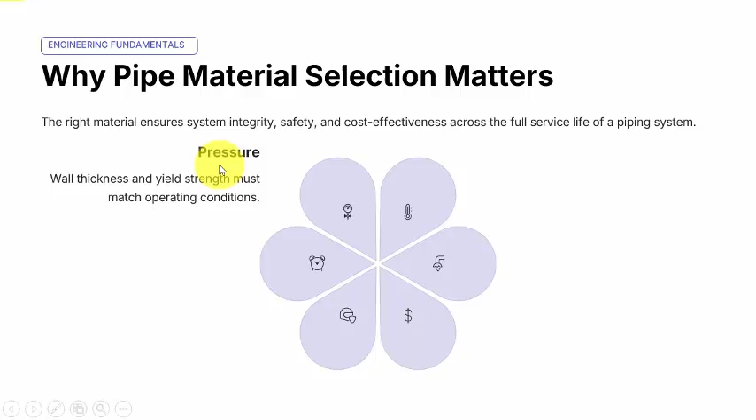Why pipe material selection matters. Selecting the correct pipe material is one of the first and most important engineering decisions during piping design. Several factors must be considered. First, the material must withstand the operating pressure without failure. Second, it must maintain its mechanical properties at the required operating temperature. Another critical factor is corrosion. The pipe must be chemically compatible with the process fluid to prevent deterioration and leakage.

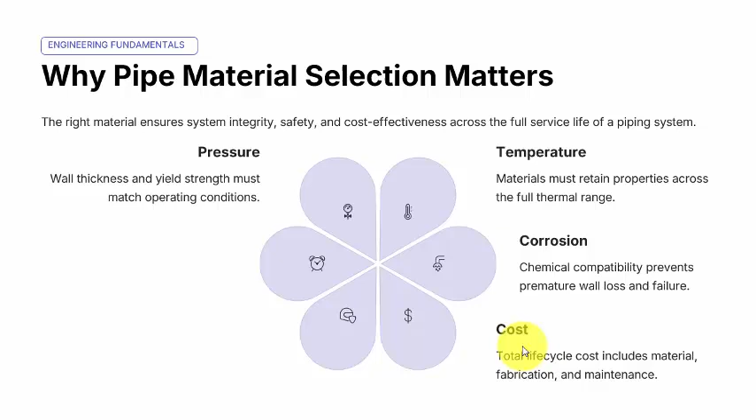Cost is also important. Engineers evaluate not only the purchase price but also fabrication, maintenance, inspection, and replacement costs throughout the system's lifetime. Finally, the selected material must provide a long service life while ensuring safe operation under all expected conditions.

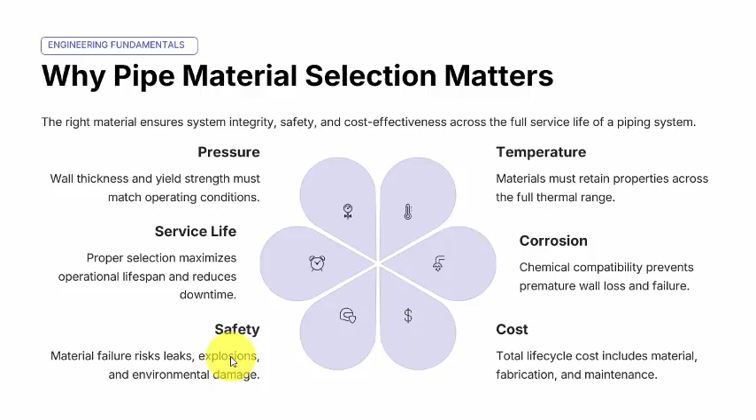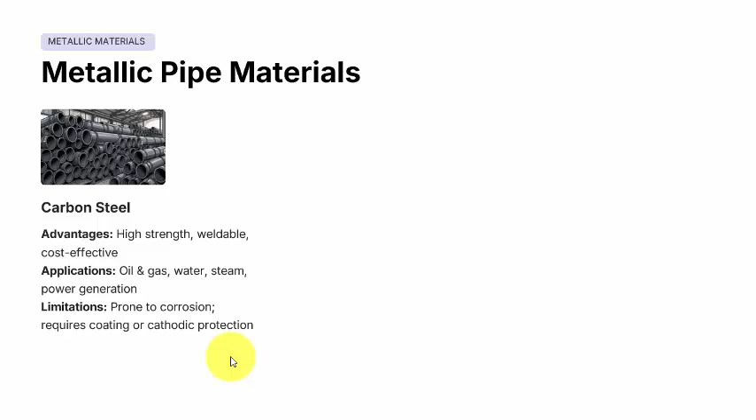Metal pipe materials. Metallic materials are the most widely used in industrial piping systems. Carbon steel is the most common choice because it provides high strength, excellent weldability, and relatively low cost. It is extensively used in oil and gas facilities, power plants, and water systems. However, it is susceptible to corrosion and often requires protective coating.

Stainless steel contains chromium, which forms a protective oxide layer against corrosion. It is commonly used in food processing, pharmaceutical plants, and chemical industries, where cleanliness and corrosion resistance are essential. Alloy steels contain additional elements such as chromium and molybdenum. These alloys improve strength and performance at high temperatures, making them suitable for refineries, boilers, and high-pressure steam services. Each metallic material offers different advantages depending on the operating conditions.

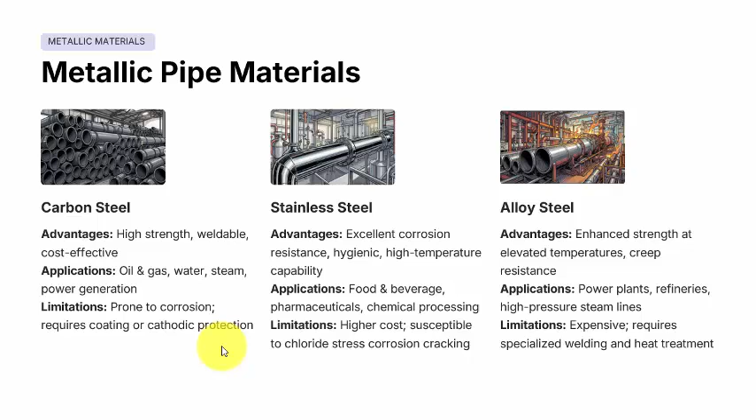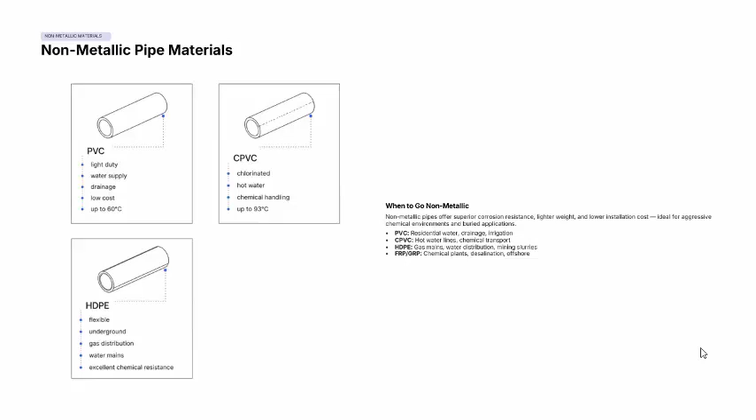Non-metallic pipe materials. Non-metallic materials are increasingly popular because of their excellent corrosion resistance and lightweight construction. PVC is commonly used for water supply, drainage, and irrigation systems. CPVC has better temperature resistance and it is suitable for hot water and chemical transport. HDPE offers outstanding flexibility and impact resistance, making it ideal for gas distribution and underground water pipelines.

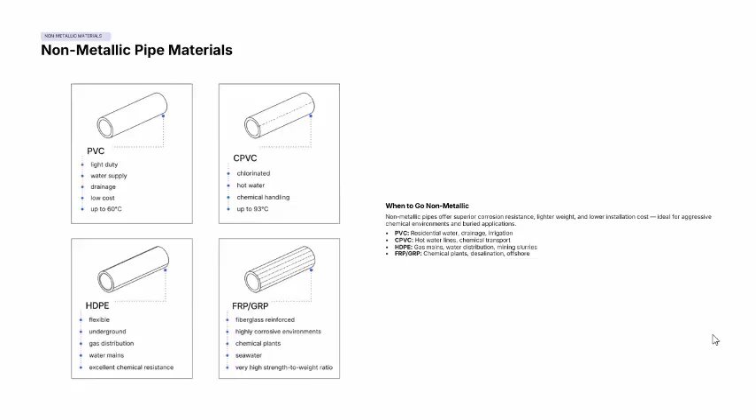FRP and GRP combine high strength with excellent corrosion resistance. These materials are frequently used in offshore facilities, desalination plants, and chemical processing industries. Although non-metallic pipes generally have lower pressure and temperature limits than metals, they provide significant advantages in corrosive environments.

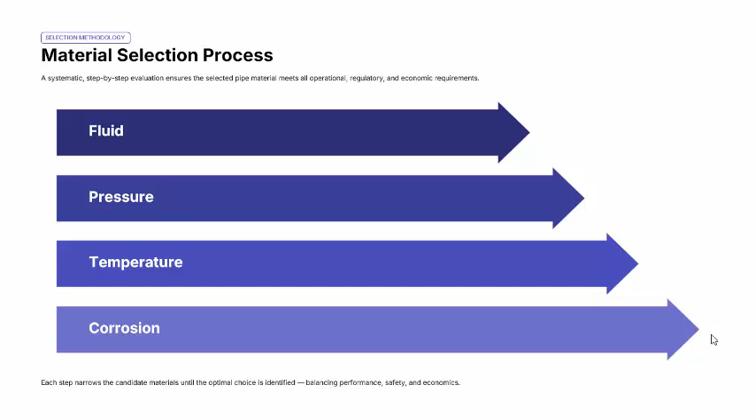Material selection process. Selecting the proper pipe material follows a systematic engineering process. The first step is understanding the process fluid and its chemical properties. Next, engineers evaluate the operating pressure and temperature because these determine the required mechanical strength. Corrosion analysis is then performed to ensure long-term durability. Finally, engineers verify that the selected material complies with applicable standards and satisfies economic requirements. The objective is to achieve the best balance between safety, performance, reliability, and cost.

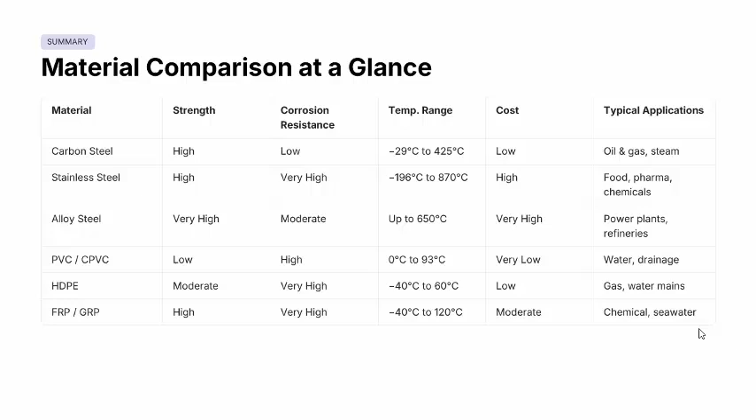Summary. To summarize, pipe material selection is one of the most critical decisions in piping engineering. Carbon steel remains the most widely used material because of its strength and affordability. Stainless steel and alloy steels are selected when corrosion resistance or high temperature performance is required. Plastic and composite materials provide excellent solutions for corrosive environments and utility services. The key message is simple. The best material is not always the strongest or the cheapest. It is the material that best matches the process conditions while ensuring safety, reliability, and long-term performance.